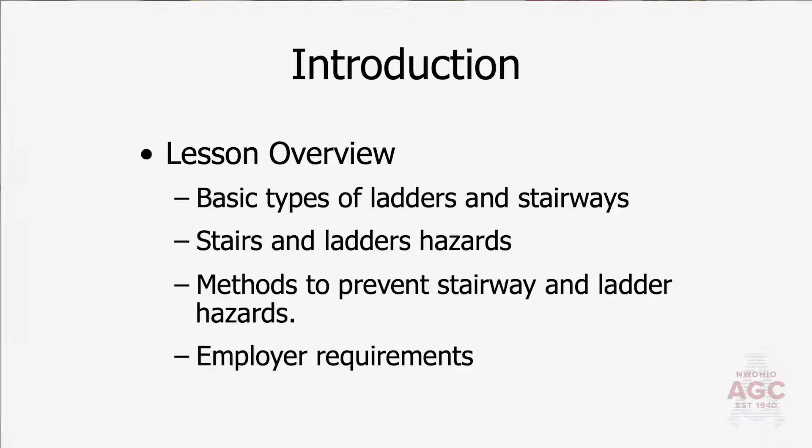Today I'd like to talk about ladders. We're going to talk about basic types of ladders, and we're going to touch on stairways and what we need to do around them as we're constructing them to make sure that we're using them safely so nobody falls down them or even falls up them. We'll cover stairs and ladders, the hazards around them, and methods to prevent stairway and ladder hazards.

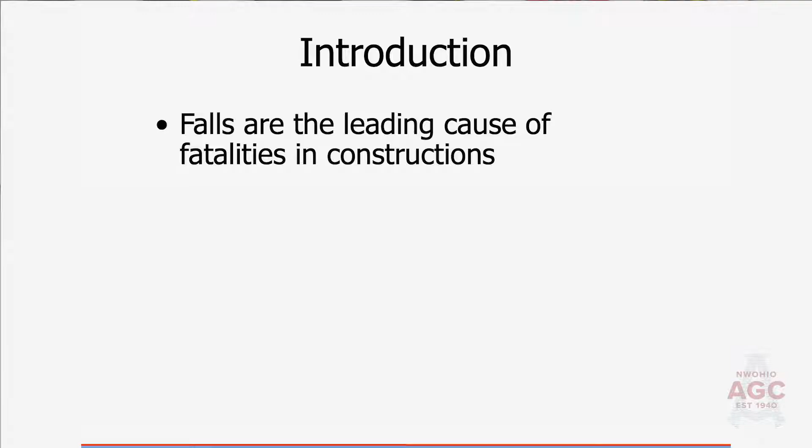Falls from ladders make up about one third of these fatalities, and it doesn't have to be from a 50 or 60 foot height. Falls from ladders that make up the fatalities are generally in the shorter range, 6 to 10, 20 feet.

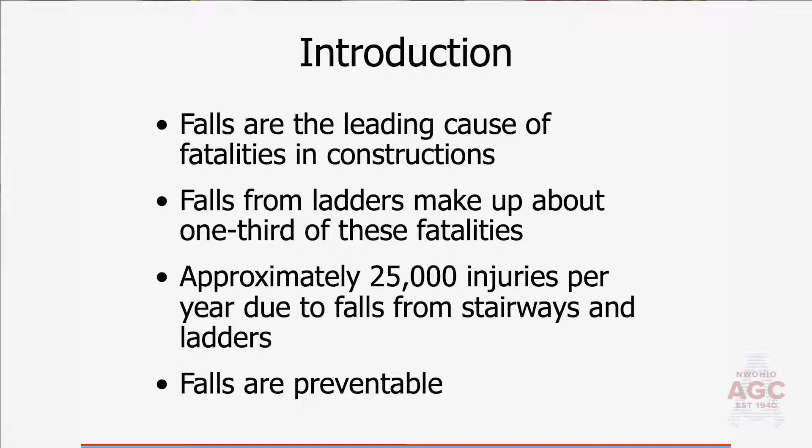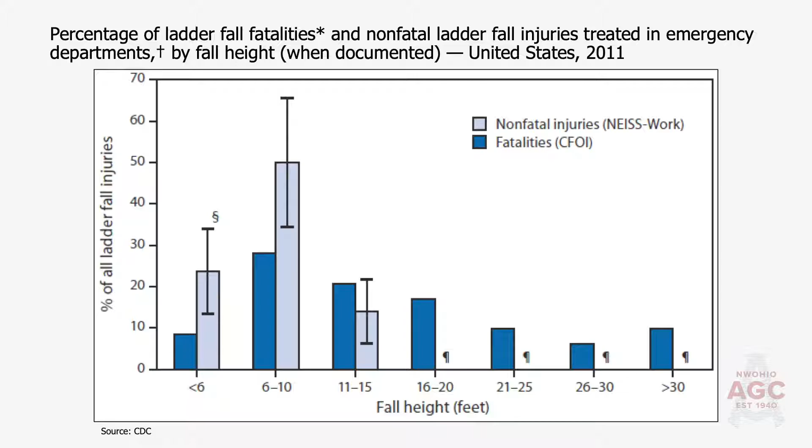Are we complacent? Do we think at that height we're safe? As you can see from the table, that's not the case. So even at the 6 to 10 foot height, we need to be aware of what we're doing. We need to follow what manufacturers say, and we even have to maintain our common sense when it comes to using ladders at that height.

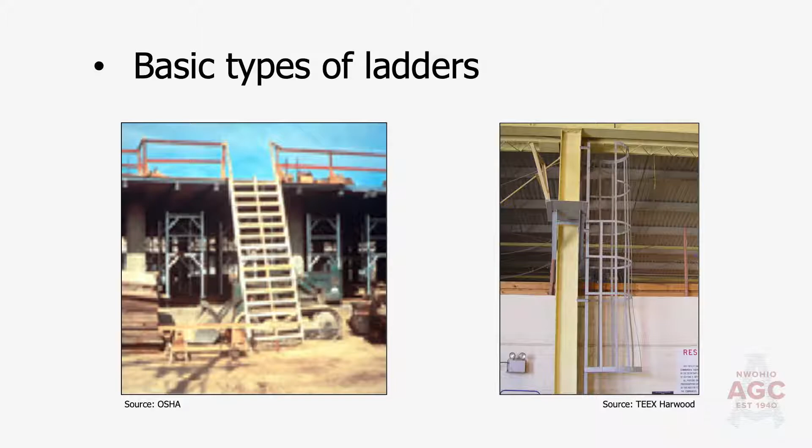There are basic types of ladders: job-built ladders, portable ladders, and stationary fixed ladders too. We're not going to talk so much about stationary or fixed ladders today. It's going to be mostly ladders such as step ladders, little giant ladders, extension ladders, different types of step ladders, and what can be used on a job site.

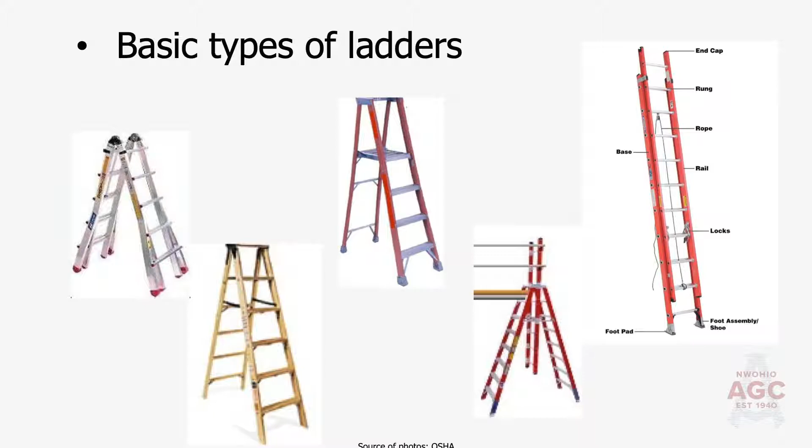Basic stairways: we're going to talk about handrails, the height of stairways, stair rails and handrails. These are the things that make up our stairway system, and we have to understand what is required to make sure that we make these and maintain these in a safe, manageable way so that nobody falls and nobody gets hurt.

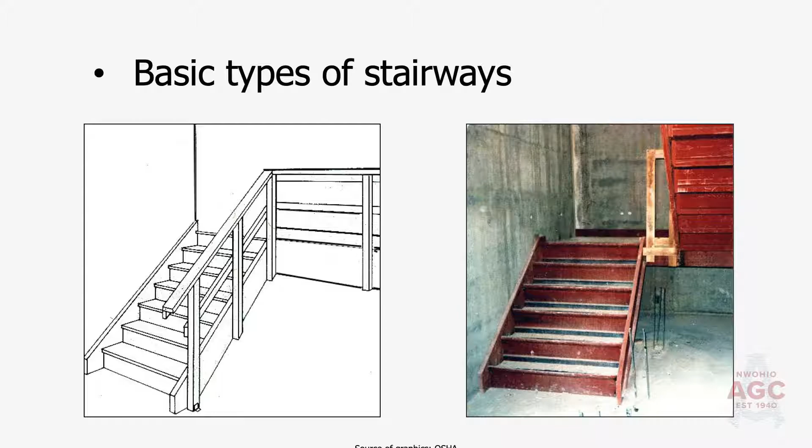Some hazards associated with stairs and ladders are simply slips, trips, and falls. Are we keeping areas at the top and bottom of stairs and ladders clear of debris? Are we keeping them free from slippery things like oils? Unfortunately, when we're using ladders and stairs, maybe we're carrying something and we can't see very well. We have to either stop carrying things, or make sure those areas are clear of debris so we don't trip and fall up or down those ladders or stairways.

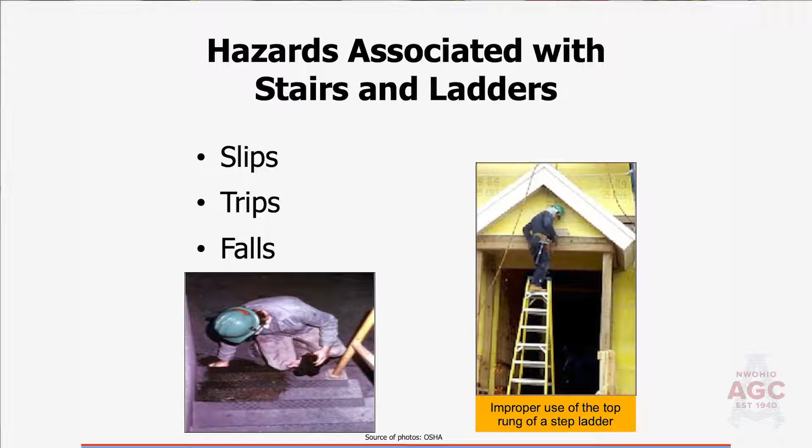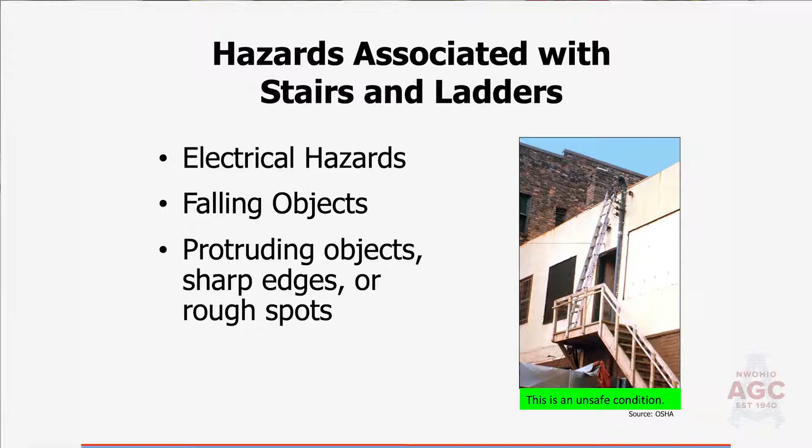We must at all times maintain at least a 10-foot clearance from electrical hazards. Electrical wires, as in this picture, coming into buildings have a weather protection on them. The electrical company most likely won't call it insulation because that insinuates it protects you from a hazard. They're not willing to accept that responsibility simply because they don't know how long those wires have been on that building, or whether the covering on them is cracked. Any crack in a wire like that exposes you to electrical hazards. So at no time should you be closer than 10 feet away from any type of electrical hazard, especially wires like what you see on the screen coming into a building.

We're going to talk about safe practices, ladder requirements, and structural defects, and how we find all this stuff: our safe practices, just what we do on a daily basis, ladder requirements, and structural defects. Inspections—are we going to inspect these ladders on a regular basis? The OSHA standard says yes, we must inspect them by a competent person.

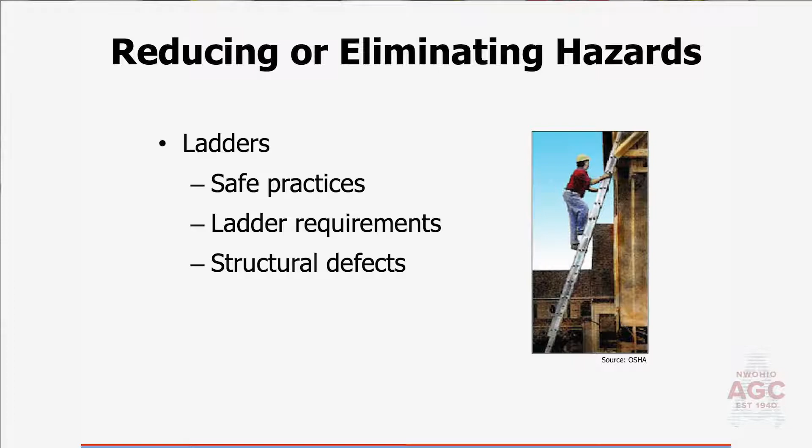Extension ladders. When we use an extension ladder to gain access to a level above us or even below us, we must make sure that those side rails extend at least 3 feet above the landing surface. Why do we do that? So that we can easily get on and off the ladder safely, instead of bending down to try and grab something that's only a foot above our landing surface. It's 3 feet above, we can just swing our legs around, climb up, climb down, do what we need to do.

Don't exceed the loaded capacity of the ladder. All ladders are rated. The ladders that should be used on job sites are 1A or 1AA. There are stickers on the ladders. Read the stickers and make sure that the ladder will adequately handle the load that is intended to be put on there. We use the ladders only as they are designed.

So we climb up and down extension ladders. We put them vertical. If we lay them flat and use them as a scaffold, that is not how they are intended to be used. They will break. They were not tested for that. The manufacturer will not stand behind there.

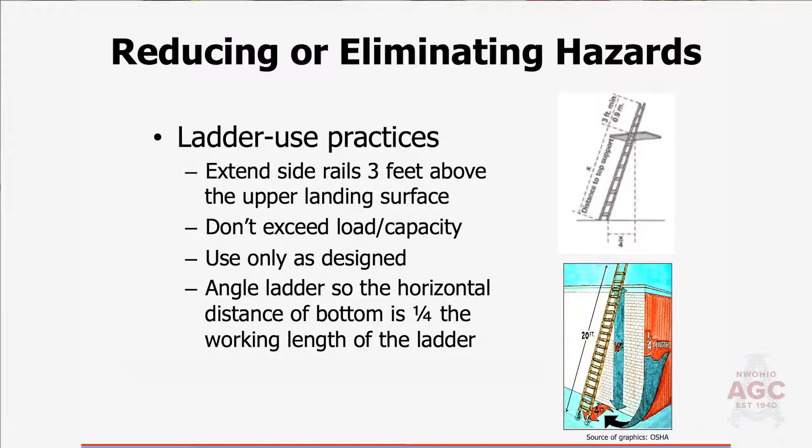Fixed ladders, no more than a 90-degree angle. These are ladders that are attached to buildings, permanently attached. If we're going to use those on a regular basis, say on a remodel, or we're using that as access to the roof, we need to inspect that. We don't know how long those ladders have been on that building. That should be the responsibility of the building owner, and that ladder should be no more than 90 degrees from horizontal, so it's a straight vertical climb.

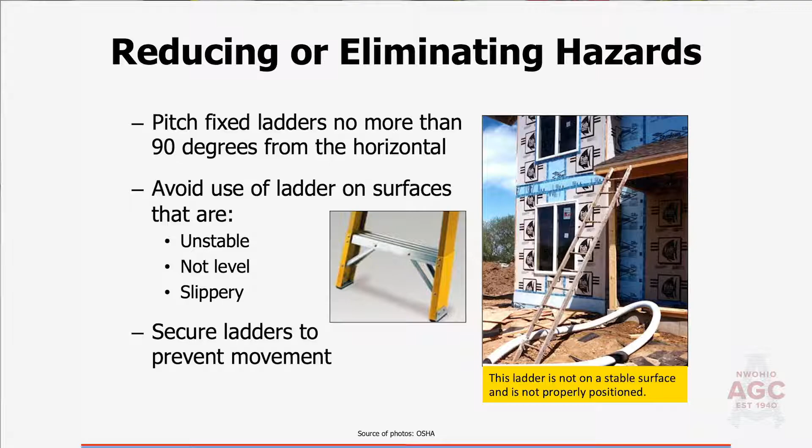Portable ladders and step ladders that we use on job sites: we want to make sure that the area around the bottom and even at the top of the extension ladder is free from debris. We want to make sure it is stable, level, and not slippery. Muddy areas, we need to accommodate for that, whether we're on a step ladder or an extension ladder. We need to make sure that all of these ladders are secured from movement.

We can do that by tying the top of it off. Remember, we're extended 3 feet above our landing level, and if we need to, we can tie that top off to make sure that it does not slide. We want to prevent movement and displacement. We want to secure it.

If we're working behind a door, we want to make sure the door is locked. We want to make sure that we are safe when we are up on a ladder. Remember, 6 to 10 foot falls - that's most of our fatalities when it comes to ladder falls.

Keep clear the areas around the top and bottom. It's hard for us to see when we're going down a ladder or even going up a ladder to get to the top of the working surface. When we get to the top, we can't have debris around there. We need a clear landing area.

When we're coming down, we're supposed to be looking forward, not looking down at our feet, so we can't even see what's below us. That area should be all clear from debris also.

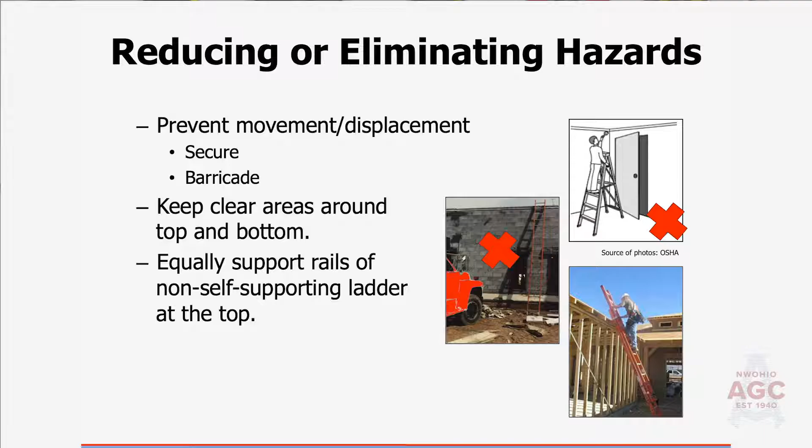Maintain 3 points of contact when we climb a ladder. That means 2 hands at all times and 1 foot, or 2 feet and 1 hand. We never, ever, ever carry things with us going up and down a ladder.

We face the ladder at all times, whether we're working on it or off of it, or whether we're ascending or descending. We want to make sure that our belt buckle stays between the side rails of the ladder. That allows the ladder to maintain its most stable position, so we won't slide from left to right and fall off the ladder.

Getting on and off the ladder, you have to be especially careful. Like I said, 3 feet above, and also make sure that there is not debris at the bottom when you try and get on or off the ladder.

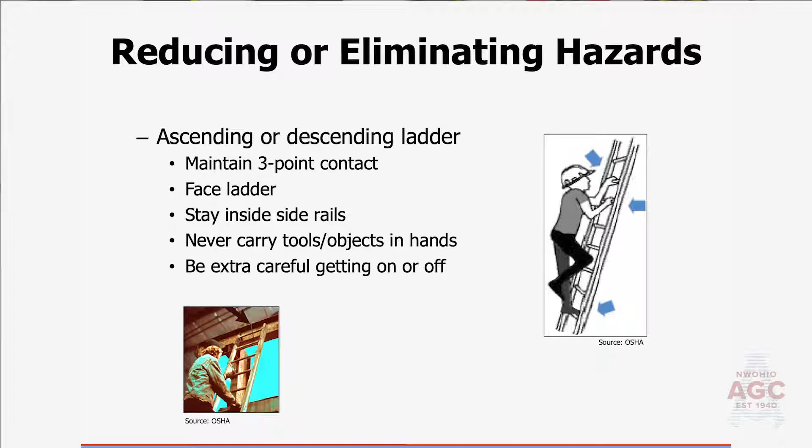Don't move, shift, or extend your extension ladder while in use. Some people will stand there and push them up as they go. That is not how you use an extension ladder.

You get closer to 10 feet from electrical wires, you need to think about what you're doing. You can't be any closer than 10 feet from electrical wires. That is in the OSHA standard. The electricity can jump, it can arc and kill you. We just need to be very, very aware of that.

Don't use the top step of a step ladder. It says it right on the step ladder. Don't use the top step, or don't even use the second from the top step. Both of those should not be used, not even as a seat at the top. That will get you not only an OSHA citation, but if you lose your balance, that can hurt you, that can even kill you.

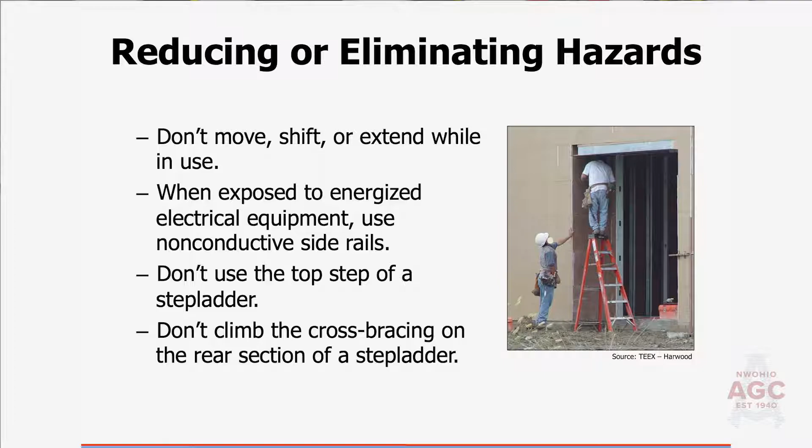Don't climb the cross bracing on the rear section of a step ladder. Now, there are step ladders made to be climbed on either side. That's okay to use, but you have to read the instructions on the step ladder to make sure you are complying with the use of that step ladder.

Single rail ladders cannot be used on construction job sites. Those are just rails, 2x4s or 4x4s that have a step nailed onto them. It's just a 4x4, and that used to be used apparently way back in the day. Those cannot be used anymore.

Inspections for ladders must be done by a competent person. They must be done periodically. I'm saying do them every day prior to each and every use. You use the ladder, you think you know it, you put it back down, you start the next day, it should be inspected. Who used that in the meantime? What happened? Did it get run over by a truck? Did it get run over by a tractor? It needs to be inspected every day prior to each and every use.

It should be inspected after any incident that could affect its safe use.

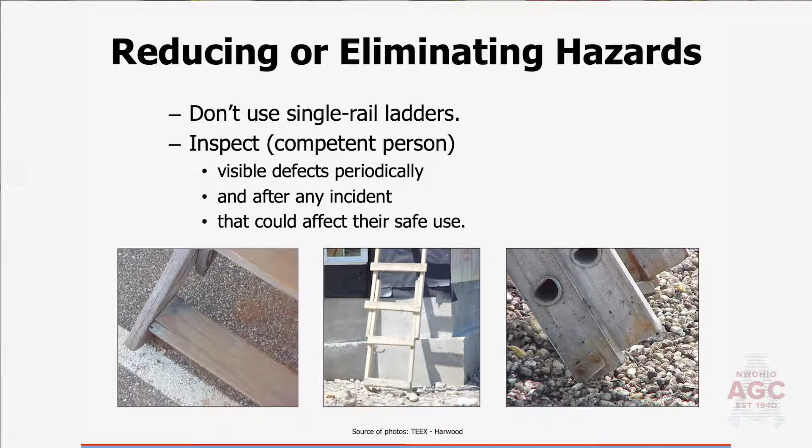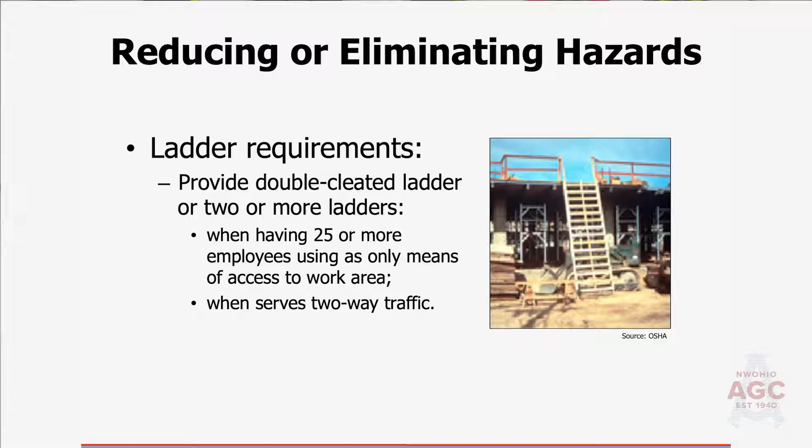Inspecting ladders, look at the rungs, the cleats, and the steps. Make sure they're parallel, level, uniformly spaced. Obviously a built ladder that you purchase, a Werner, Louisville, Kentucky ladder, or whatever the case may be, 10 to 14 inches apart for the rungs, side rails and steps 8 to 12 inches apart. These are not things we measure on a regular basis because they are manufactured ladders. But if OSHA happened to come across a job-built ladder, these are the specifications they're going to measure to make sure it meets the requirements of the OSHA standard when it comes to job-built ladders.

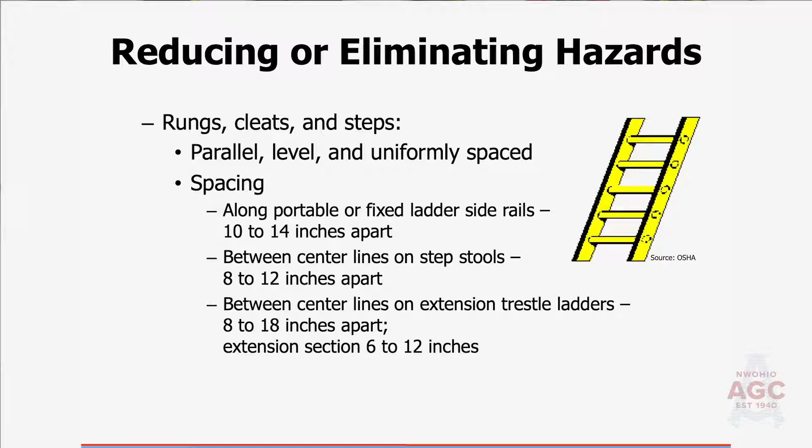Tying ladders together to create longer sections - this is something we see pictures of all the time. I'm hoping that in union construction in Northwest Ohio, we never, ever see that tying of two ladders together. If it is an extension ladder that is made to be used together, that's one thing. But to tie two ladders together, that is absolutely unacceptable. Somebody's going to get hurt, somebody's going to get killed.

A step ladder must have a metal spreader or locking device to keep the legs apart. If that is broken or not there, then that is cause to take the ladder out of service.

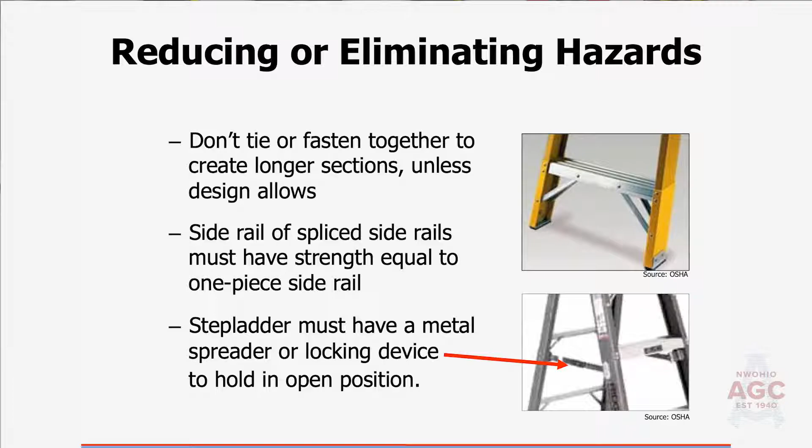During our inspections, we will remove the ladder from service. We will take it and tag it. My recommendation, if it is blatantly broken and can never be used again, it should be cut - not in half, but cut down the rungs so you have two separate rails with metal sticking out. Otherwise, somebody's going to take that ladder and put it in their truck, take it home, or take it to a different job site. Under no condition, under no circumstance, should a ladder ever be reused if it is cut top or bottom. I've seen contractors that have taken extension ladders and cut them down shorter because the bottom or top has been cracked, and they actually use them in trenches.

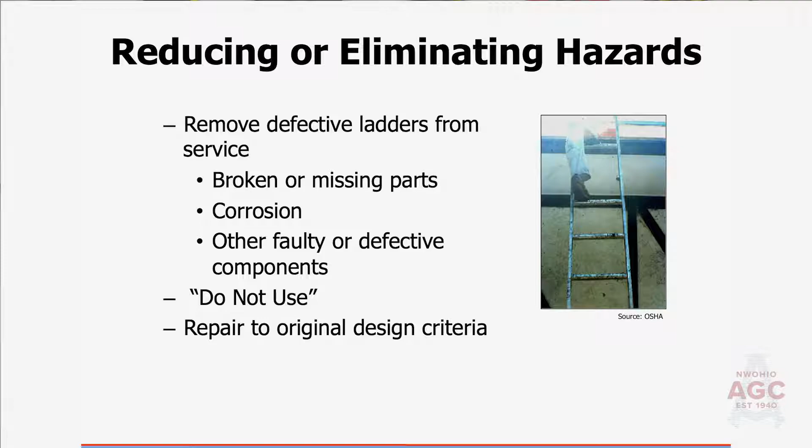A ladder is a ladder. It doesn't matter where you use it—if it's in a trench or on a job site, it has to meet the same OSHA standard specifications. For hand and stair rails, there are situations with 4 or more risers, or 30 inches of rise, where we need to install a handrail on stairways or stair rail systems. For unprotected sides and edges with a rise of 6 feet or more, we need to install stair rail systems. This is all in the OSHA standard.

What does this do? This simply protects us from falling. A handrail system is attached to the wall, while a stair rail system is on the open side of the stairway. The stair rail could be on both sides, or you could have a handrail on both sides—wall to wall or open to open. It doesn't matter, but we must have either a handrail or a stair rail system there.

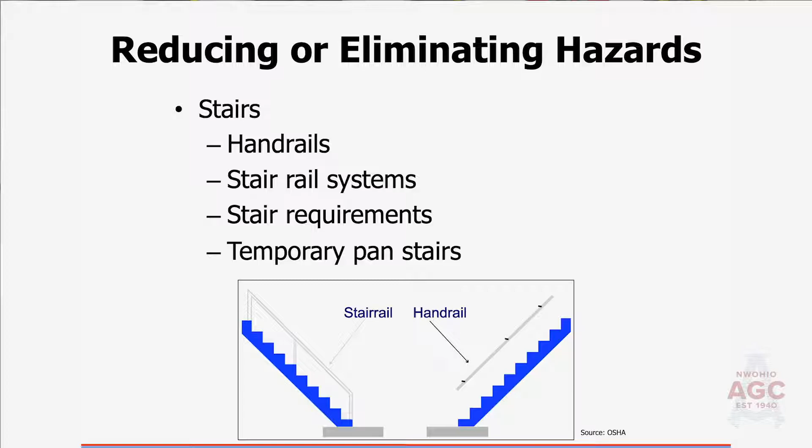We have to build our stair rail systems and stairs to certain OSHA standards: uniform riser height and tread depth. It's amazing how, just like at home, if the riser height differs by a quarter inch or three-eighths of an inch, it can make you miss a step or two. So it all has to be the same, and the tread depth has to be the same—with a 30 to 50 degree angle on the stairs so they're not too shallow or too steep.

We must create a landing at every 12 feet. Any projection on the stair rail or handrail system must be eliminated so we don't catch our clothing, tool bag, or anything else on it—a nail head or a piece of wood, whatever it may be. If we catch our tool bag or our hand on there, it can hurt us, grab us, stop us, send us backwards, and make us fall.

We want to make sure that all of our stairs, whether good wood or good metal, are not slippery. If they do become slippery, we want to make sure we can eliminate that, wipe it up, and make it safe to climb.

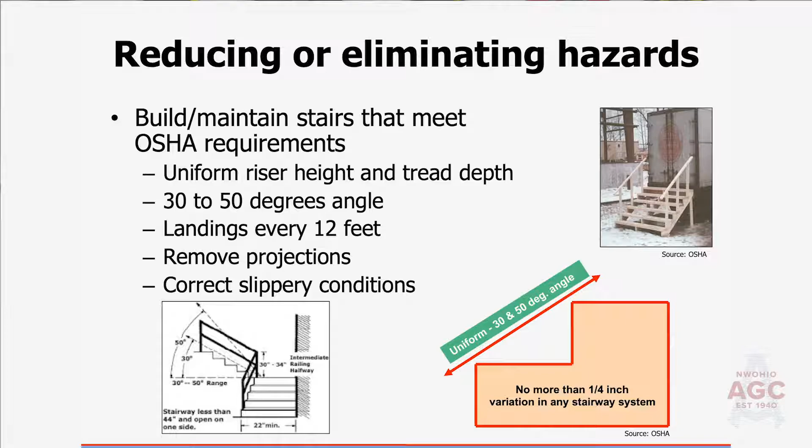Temporary pan stairs are one of the first things installed in a building—its stairway system. But what we don't do right away is fill those pans with concrete; that gets done later on the job site. We cannot use these stairs—it's an OSHA violation to use them until that pan system is filled in. Now we can fill that in with a substance such as wood or even pink or blue board. I've seen pink or blue board used in those, and OSHA has allowed those stairs without saying anything. But we cannot use stairs where there is nothing in those pans.

Those pans actually have a 1.5 inch lip on the front and back to hold the concrete. Going up and down those stairs without the pans being filled is a trip hazard—that 1.5 inch lip on the front of each stair creates a trip hazard. So we must fill those with a substantial material, whether it's wood, pink board, or blue board insulation, to make sure those trip hazards are eliminated.

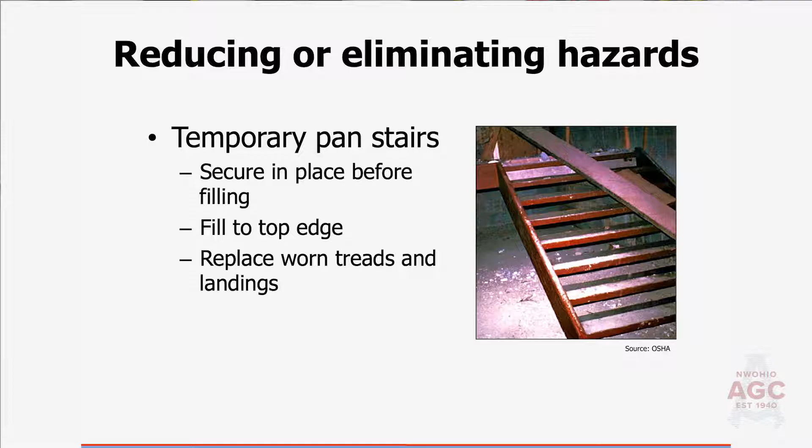As employers, we have to comply with OSHA standards related to stairs and ladders. We must train employees on ladders and stairs, and we must do proper inspections. A competent person must inspect ladders on a regular basis, and my recommendation is to inspect them daily. We all must comply with manufacturer's requirements and recommendations for all ladders.

On our ladders, whether a step ladder or extension ladder, there will be stickers telling you exactly what you can and cannot do. Those stickers must be legible. If they are not, you can contact the manufacturer and they will send you new ones, maybe $6 a sticker. The stickers must be legible, and we must be able to follow the instructions on those ladders.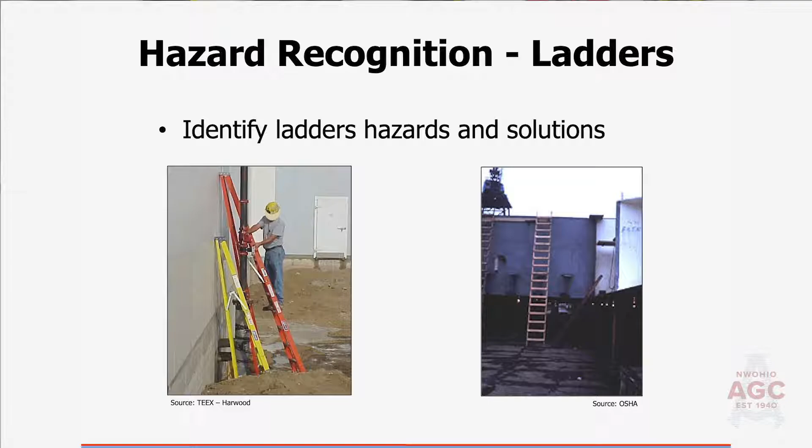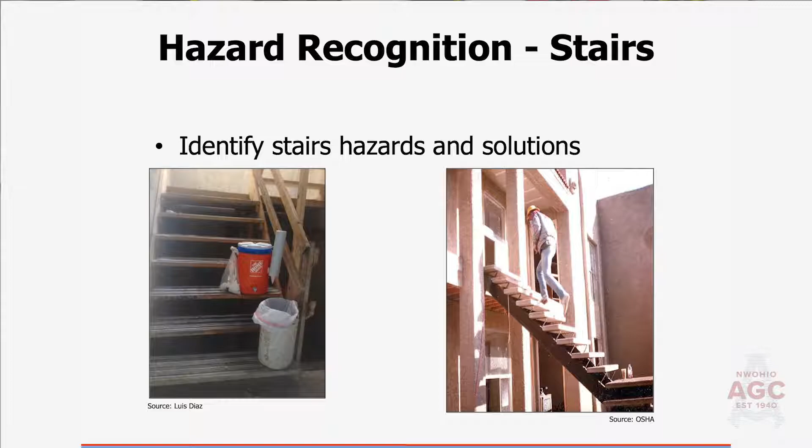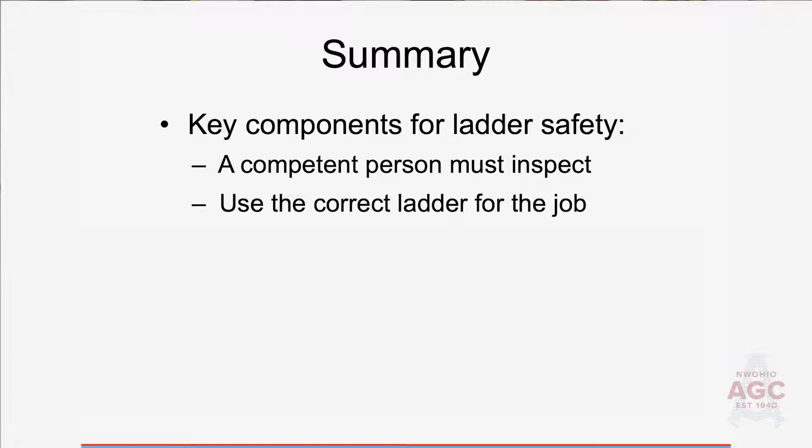Key components for ladder safety: a competent person must inspect my ladders on a regular basis, I say daily. Use the correct ladder for the job, extension or step ladder. Make sure if it's a step ladder, we don't use it as an extension or straight ladder. Use the correct angle, supports, treads, cross braces, and rails, and inspect all those prior to each use. Do not overload the ladder, and the employer must train you in proper use of a ladder.

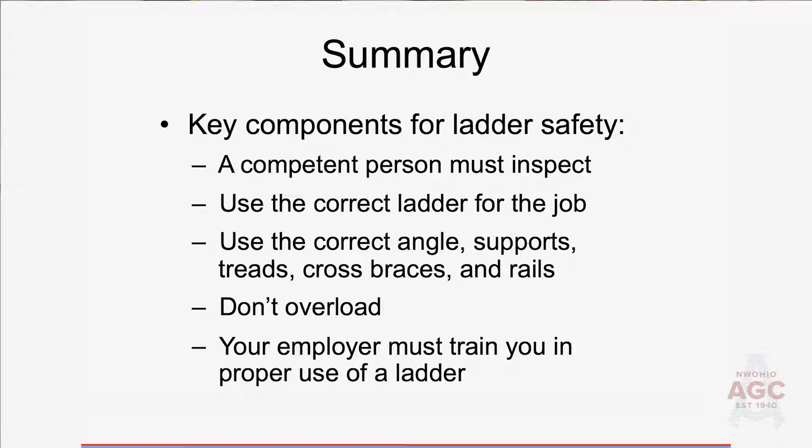Components of stairway safety are treads. Make sure our treads are uniform, our risers are uniform, our handrails, stair rails, and guardrails are intact and installed properly. Our landings and platforms are installed at every 12 feet. Our pans are filled with a substantial material such as wood, blue board, pink board, or concrete before we use them. If they're not filled with a substantial material, do not use those stairways.

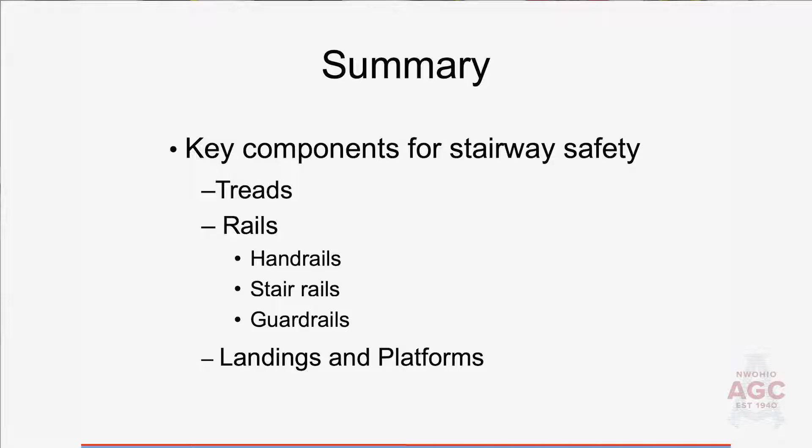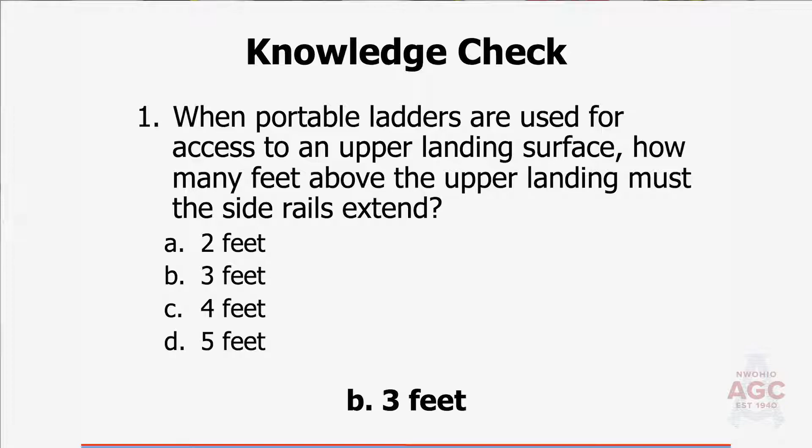Okay, a couple of quick questions. When portable ladders are used for access to an upper landing surface, how many feet above the upper landing must the side rails extend? Correct, 3 feet. You can use metal ladders around power lines or exposed energized electrical equipment.

A, true, but only if there isn't any other option to get the work done. Or B, false, you should never use a metal ladder in this circumstance. The answer is false, but I want to comment on A, but only if there isn't any other option to get the work done. That will never be an answer to an OSHA question. Any other option to get the work done, that's not an answer. There's always a better way.

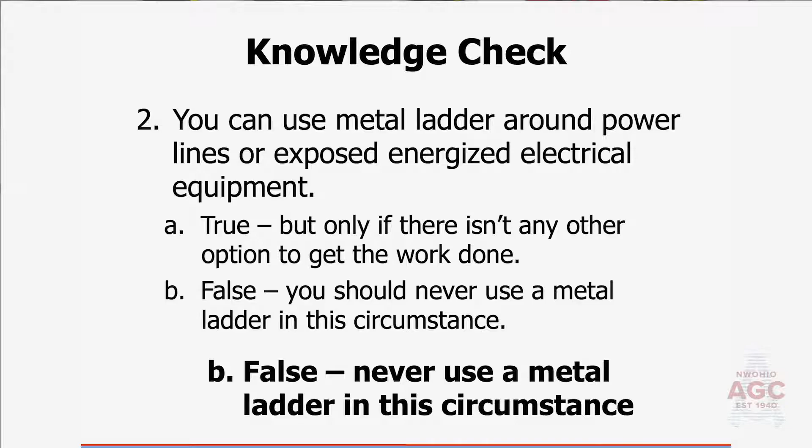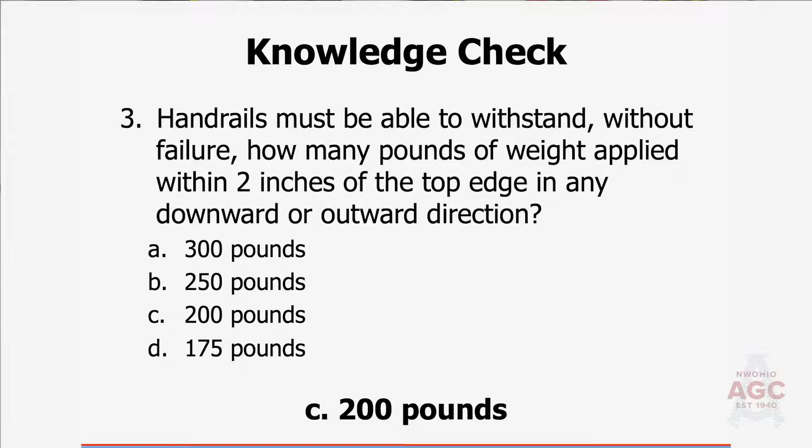Thank you for participating in this stairway and ladder presentation. There will be a short video afterwards, followed by some questions throughout the video.